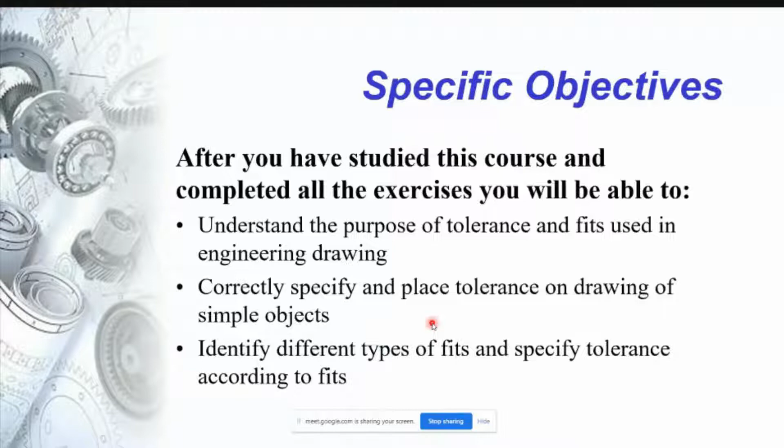Let's look at a drawing that you may have already seen before. In the previous exercise, there is an assembly consisting of pulley number 1, shaft number 2, nut number 3, and washer number 4. In shaft number 2, there is a dimension that has a suffix of g6.

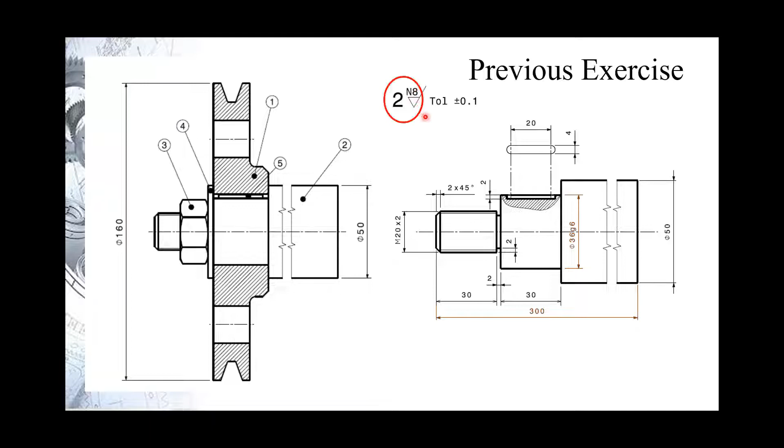g6 is the tolerance for the shaft diameter. And there is also another symbol here, which is N8, that is referred to the IT grade of the surface roughness, and also the general tolerance of 0.1.

Similarly, in the pulley, there is a tolerance. There is a hole with dimension of 36 H7. H7 is also the tolerance. And N8 is referred to the IT grade of the surface roughness. And the general tolerance is 0.1.

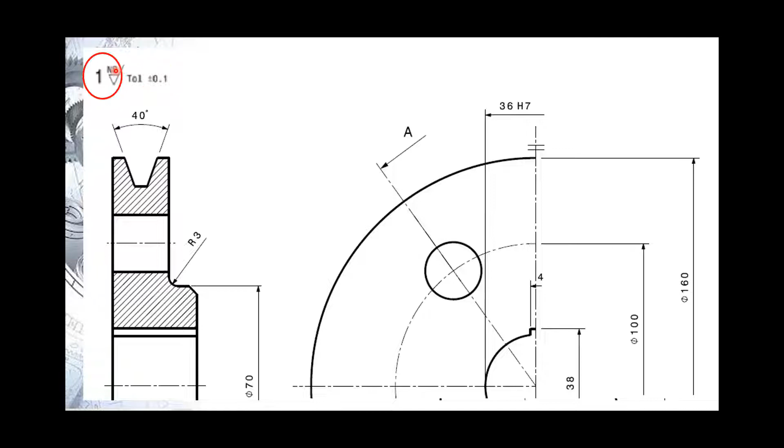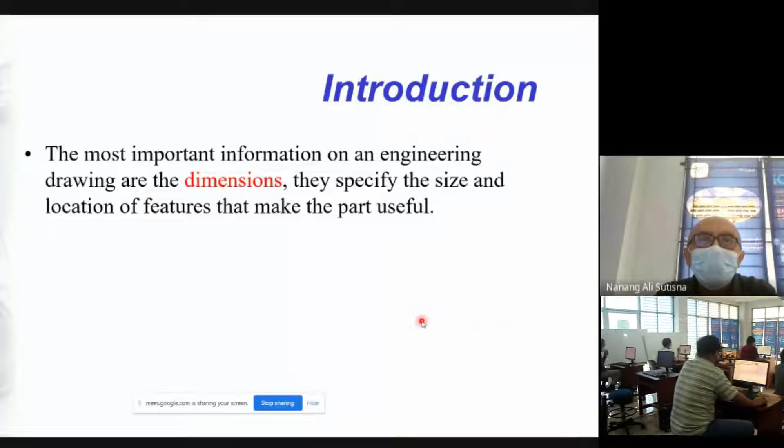Before going back, you need to understand that dimension is the most important aspect of the drawing. If you receive a drawing without dimension, you cannot make the part out of that drawing.

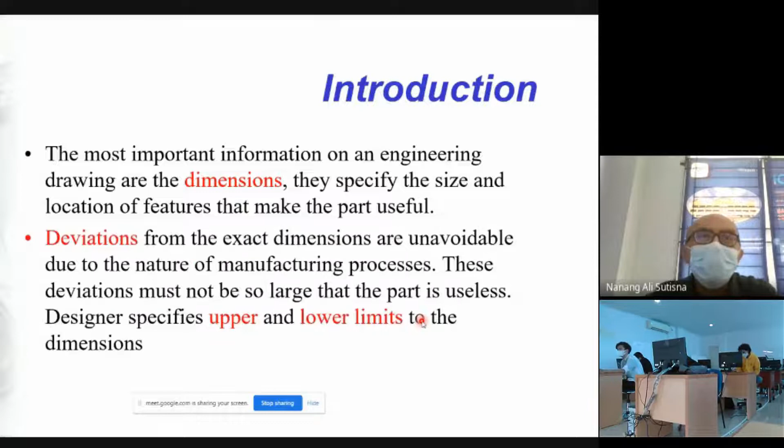Deviation from the exact dimension are unavoidable. Why? Because of the nature of the manufacturing process, the person who makes the part is different, the machine used to make the part is also different precision. Old machine and new machine, high precision machine and low precision machine, will produce different quality, different dimension, deviation. There must be a deviation.

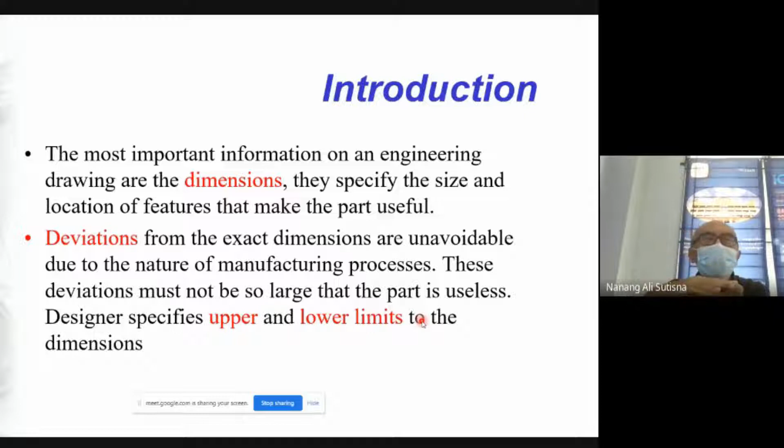So as a designer, you have to define how big it can differ from the basic size. So you will need to define the upper limit and the lower limit, so your part will be useful. Otherwise, it will not function.

We learn about tolerance and how important this is, especially in mass production. So the key point from this learning is when the size is tolerance, it is allowed to vary within a range limits.

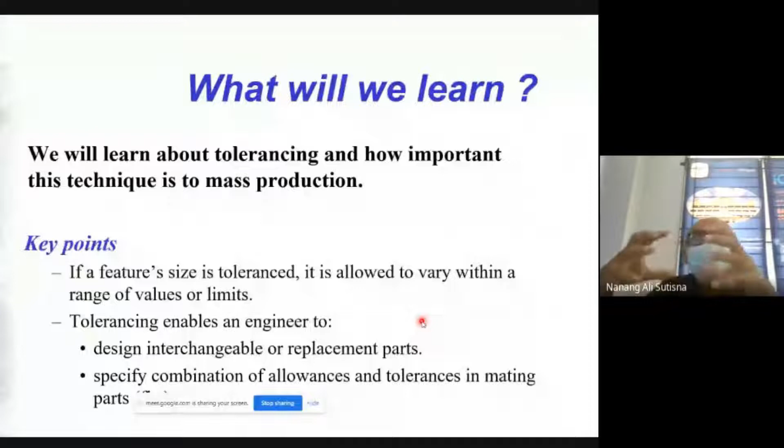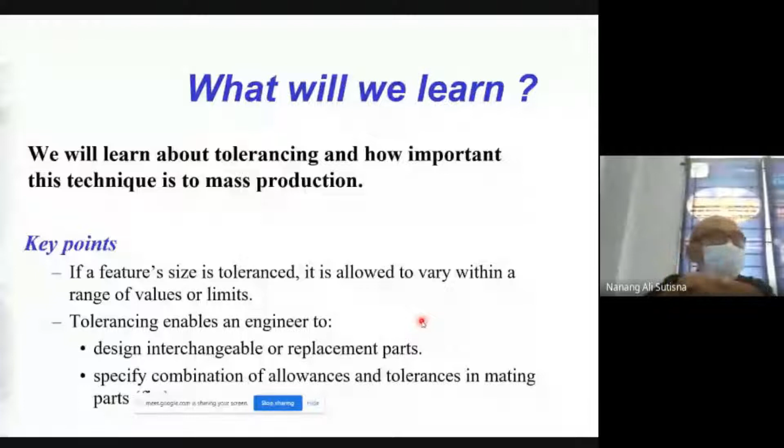And it will enable the designer to design interchangeable parts. So that's why you can buy the part from any other place in the world and you can fit them together because it's interchangeable due to this tolerance. And it specifies the combination of allowance and tolerance in mating parts.

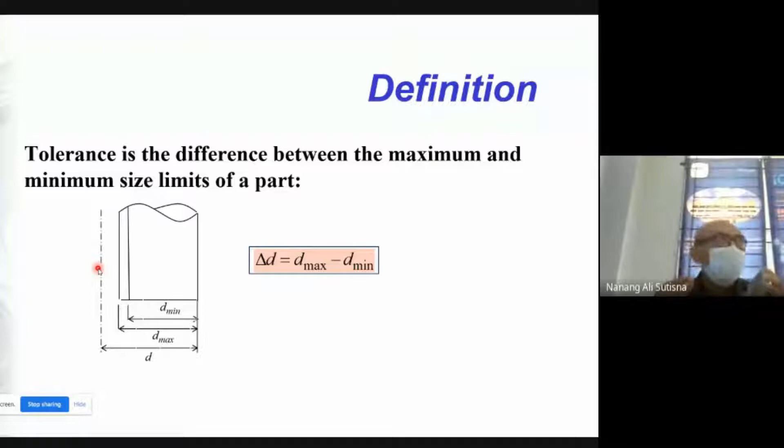And how much smaller? That's the question. So it's governed by the standard tolerance. Our concern is, if you make the part with very high tolerance, a very tight tolerance, then it must be made by a very high precision machine. So it will incur higher cost. If you want to make it very precise, high precision, then the part will be expensive.

But if it is very low tolerance, then the part may not function. It's too loose, for example, because the difference or the tolerance is too big, so it might not fit correctly.

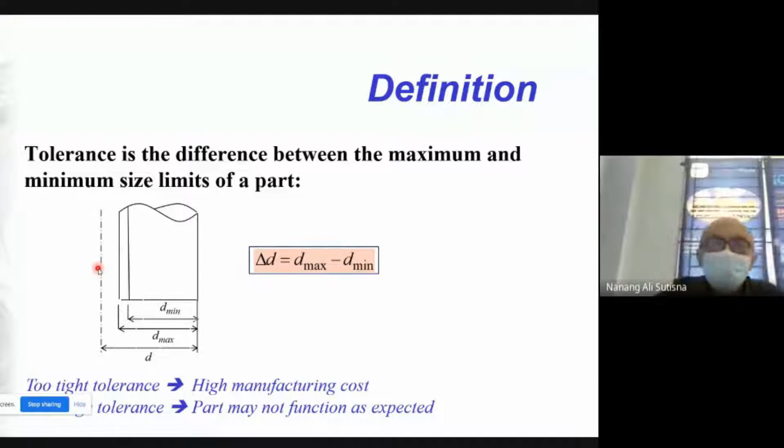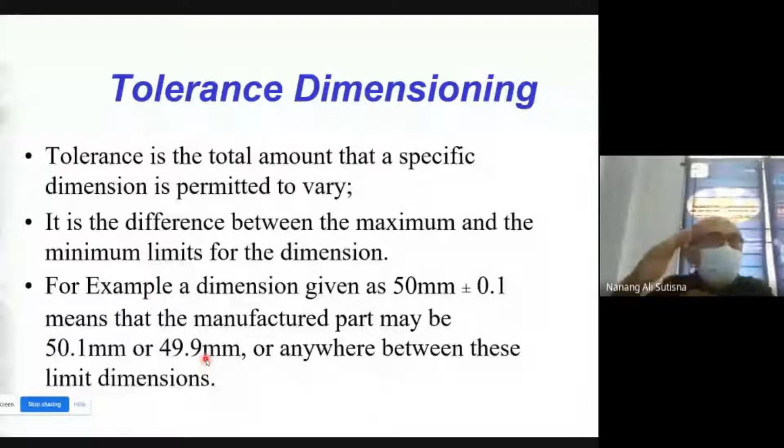Let's say this example: if the dimension is 50 millimeters plus minus 0.1, it means that you can make the part between 50.1 and 49.9. So in between, you can make it between 50.1 and 49.9. It cannot go bigger than 50.1 or smaller than 49.9. So your part will be in between. That's why you can make it anywhere, but as long as it is within the range of the limits, then the part will function. Right?

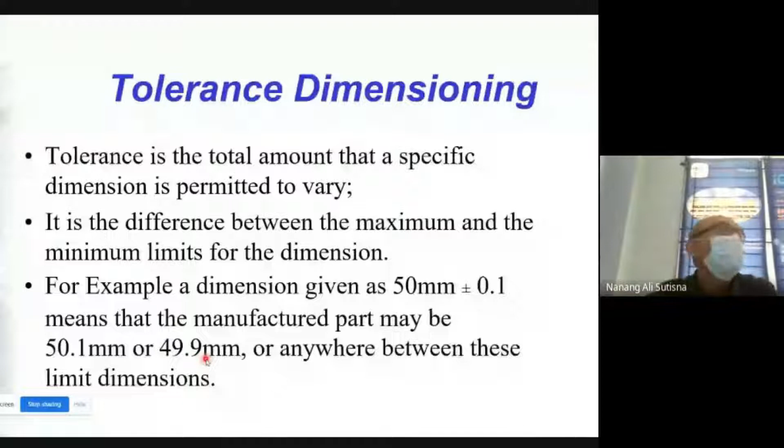This is the illustration. So this is the hole with 50 plus minus 0.1. But the shaft cannot be using 50 something. It must be 49.8 plus 0, meaning that it cannot be bigger than 49.8, and it can be smaller, minus 0.1.

So the shaft will always be smaller than the hole. Suppose that the hole is made with a lower limit, which is 49.9, and the shaft is at the maximum size, which is 49.8, it still can fit in because the shaft is smaller, 49.8, and the hole is 49.9.

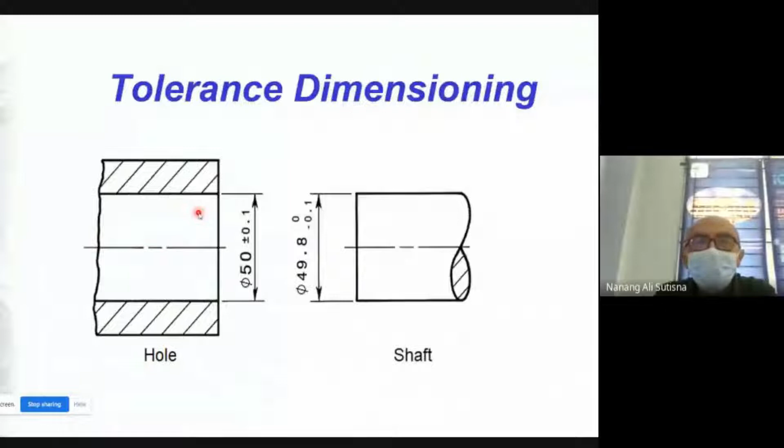How the tolerance is written? This is important for you. If you look at this, it is the tolerance. The upper dimension is the larger size, and the lower is the smaller size. Or it can be like this in the hole, or it may be written in the single form. You put the lower limit, then dash, then the upper limit. So this is one of the ways of writing the tolerance.

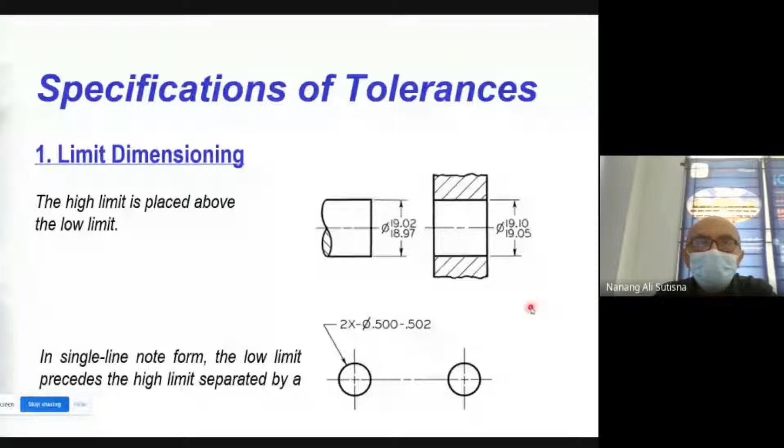The second way of writing tolerance is using plus or minus dimension. There are two types. The first is unilateral tolerance, where it only goes from 0 and bigger, or from 0 and smaller, just one direction, either smaller or bigger. So in this case, it is 47.70, it cannot be bigger than that, but it can be smaller than 47.70 with the tolerance of minus 0.05.

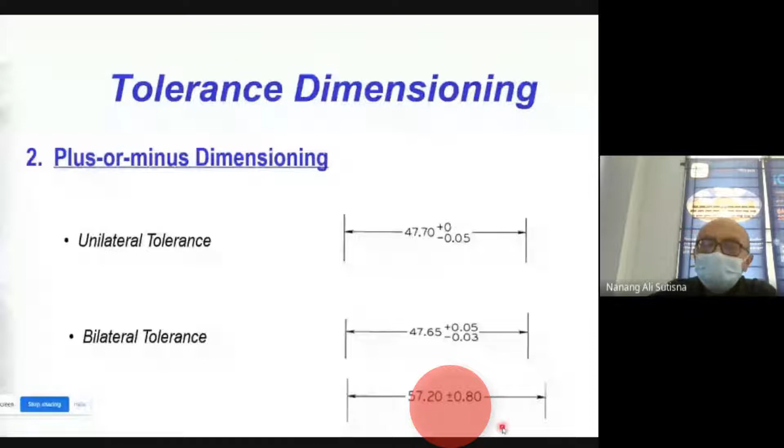Or it can use the bilateral tolerance. So you will have 47.65 plus minus 0.05, plus 0.05 and minus 0.03. As well as you use the same value for plus and minus, like 57.20 plus minus 0.8. The cumulative tolerance.

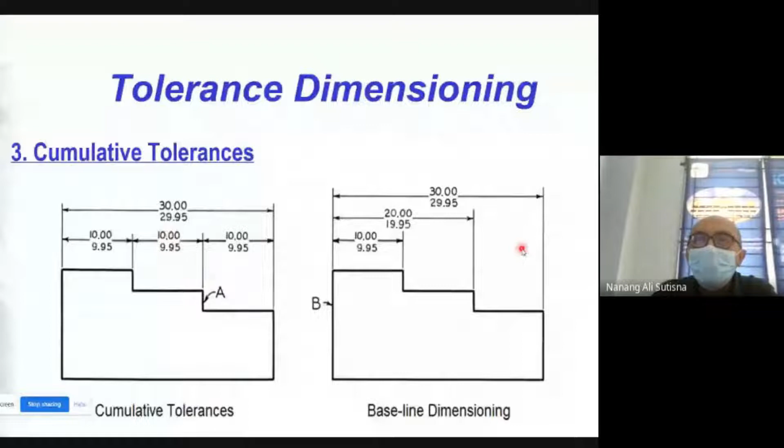It will make it confused. The operator, they don't see this. They only make it 9.95, 9.95, 9.95. Then by the end of the day, the result will be 29.85, which is out of tolerance. So you need to remove one of the dimensions that is not important. You can look at the right picture here. The dimension is not important. Okay, this is the basic understanding of the deviation.

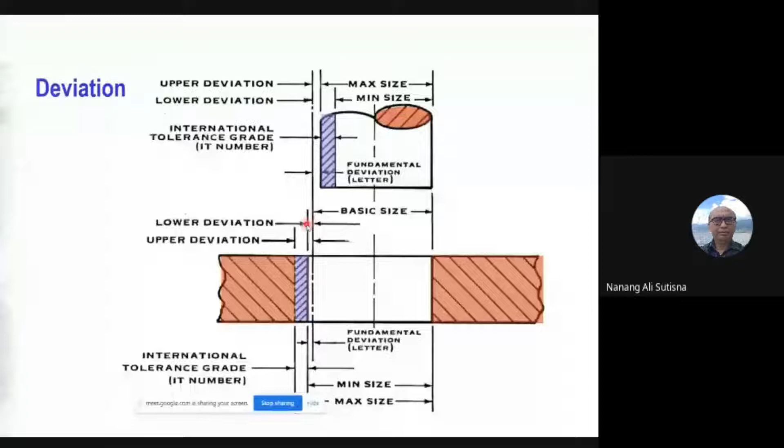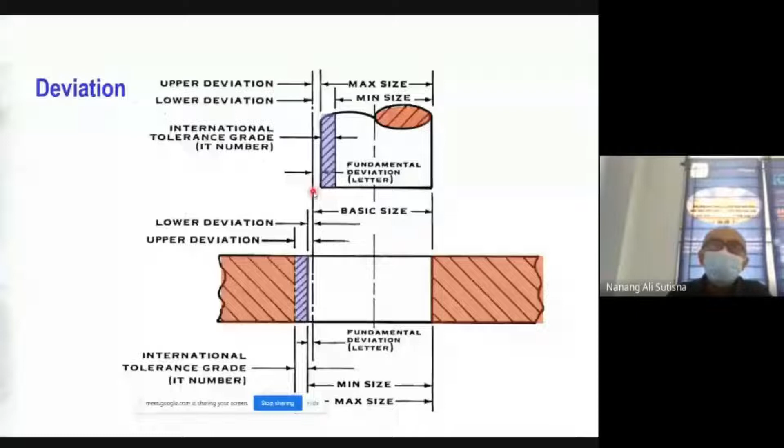There is a so-called fundamental deviation here. This is a basic size. The basic size of the shaft is here, the smaller size. But the basic size of the hole is the smaller size of the hole. But the basic size of holes will be bigger than the basic size of shaft. So if you look at this number, it means that if it is capital letter, that is the tolerance of the hole. If you see the lowercase, it will be for shaft tolerance.

So if combine, the fit will be 50 H8 F7. The hole will have H8 for tolerance and F7 for shaft tolerance. What is the value of H8 and F7? For diameter 50, I just would like to introduce you to the IT grade. When you look at this, 8 and 7,

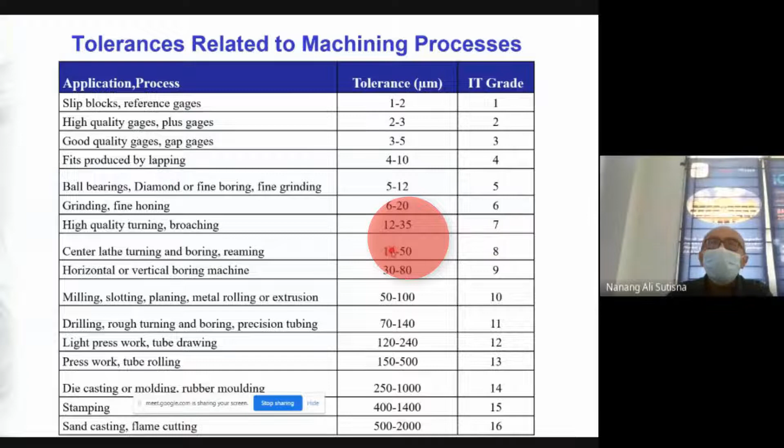if you make it grade 8, then the process will be the center lathe, turning, boring, or reaming. If you say this is grade 7, then it must be the high quality turning or broaching or reaming. So this is the quality of the surface, and it is related to the tolerance. If you choose the grade is 7, then the tolerance is between 12 micron to 35 micron. If grade 8, the tolerance is between 14 micron to 50 micron. So this means IT grade 8, IT grade 7.

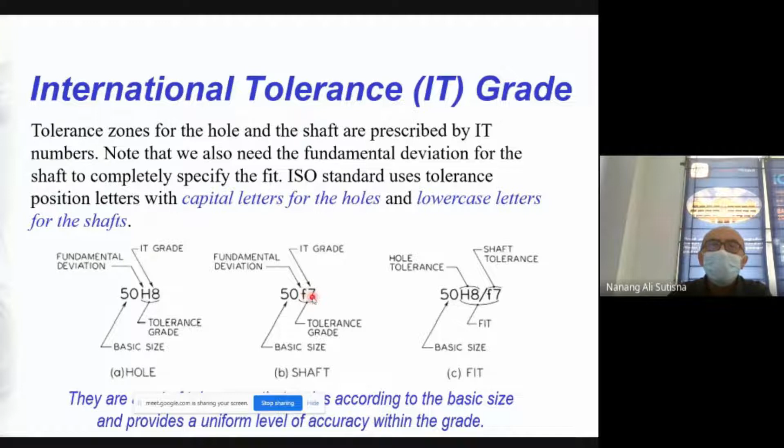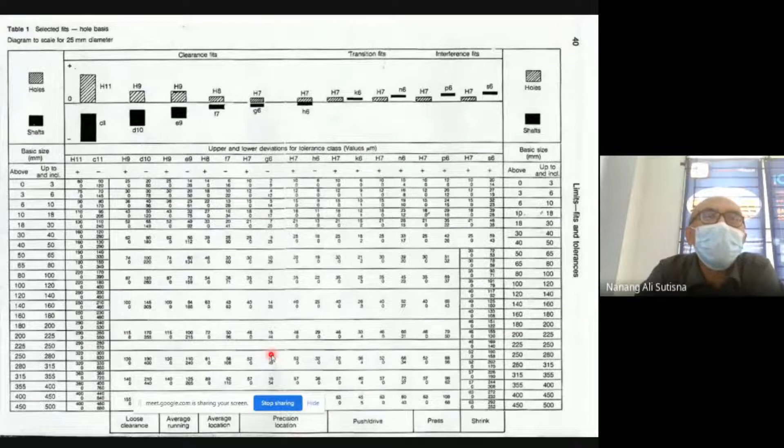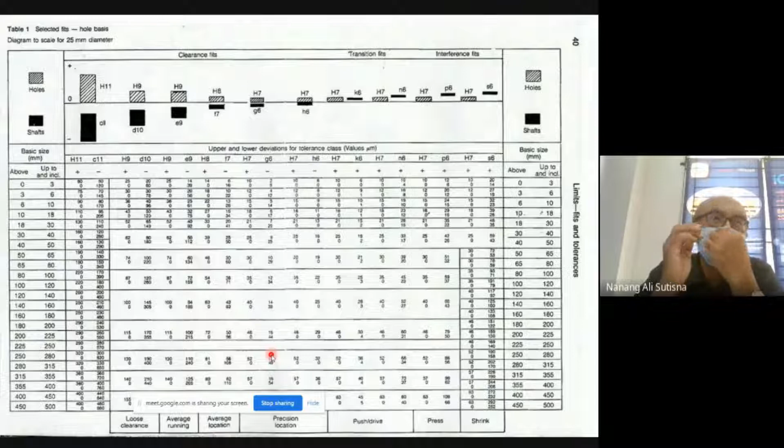And what means by H? This is the most important table as a designer or as a manufacturer. When you receive a drawing, it said the hole is H7 and the shaft is G6. What is the size? What is the tolerance? Now let's look at this table.

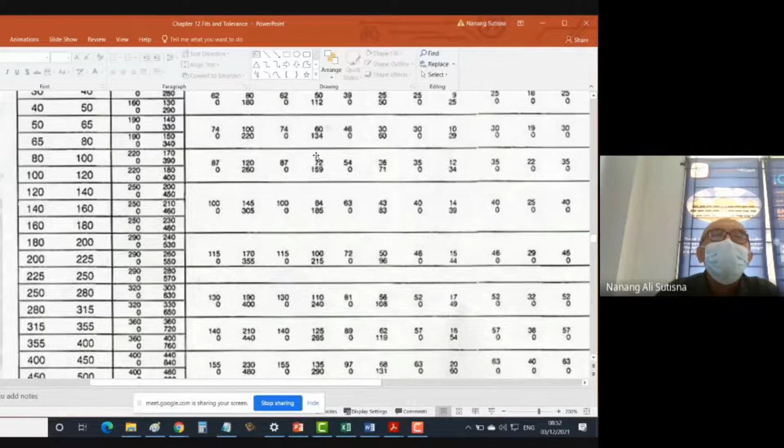I think I'll make it bigger. First of all, look at the, can you all see this number? Online students, can you see this number here? Yes, sir. Okay, good.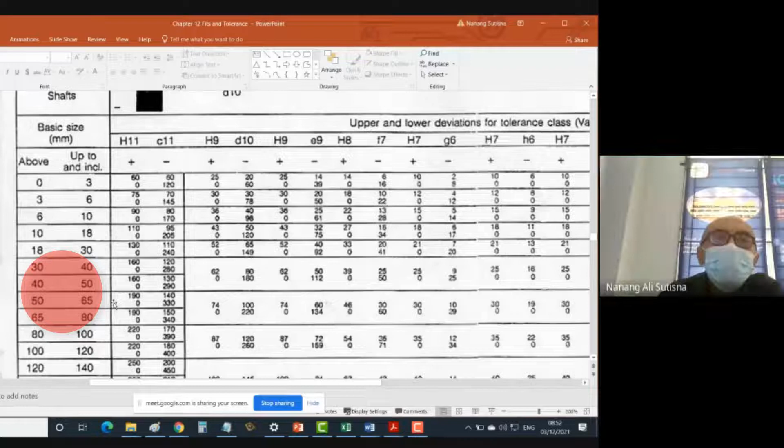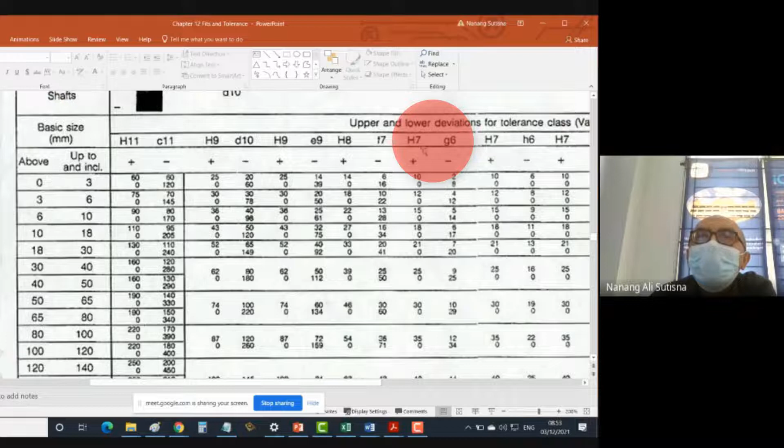So our size is 50, right? Before it's 50, right? 50 millimeters here. So it can be here or it can be here. Or if in between, then you can use this as well. When the diameter size is 50 millimeters, then go to the H7 and G6 here.

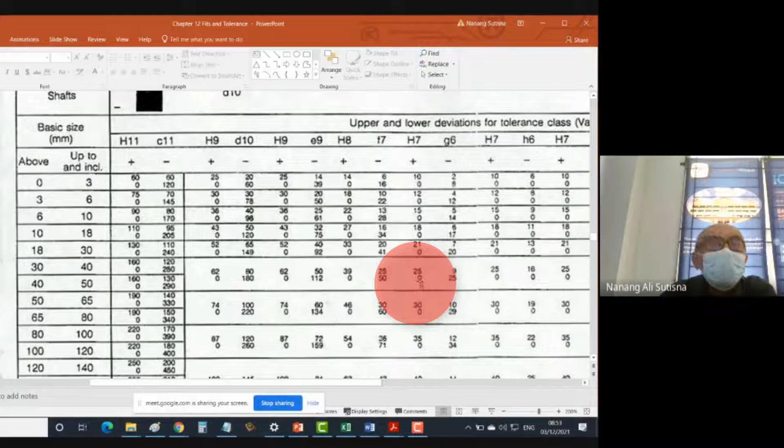H7 for hole, use plus sign, and this 25 and 0 in micron. So your size is 50 plus the tolerance 0.025 and 0. So this is the value of the limits. And the shaft is minus, G6 is minus. So 50 minus 0.009 and minus 0.025. So this is the tolerance.

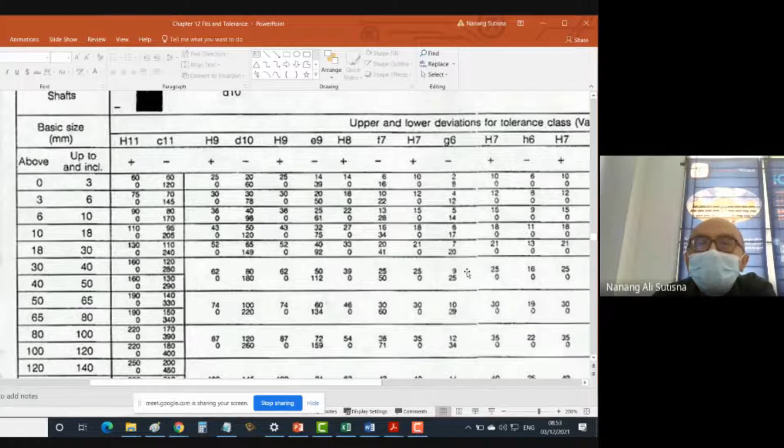So there are two types of tolerance. What we have talked so far, the limit.

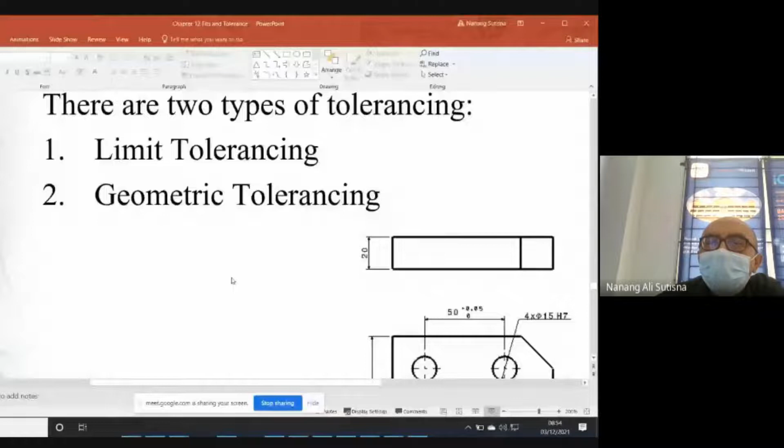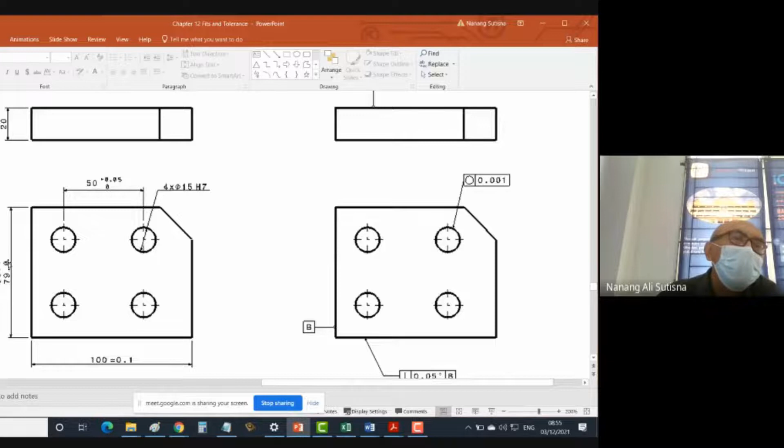And what is the geometric tolerance? Here you have 20 millimeters, and the distance is 50 plus 0.05 and 0. This size is 80.1, and 79.9 minimum, this is maximum. And this size is 100 plus minus 0.1. So it's called the limit tolerance, only for dimension.

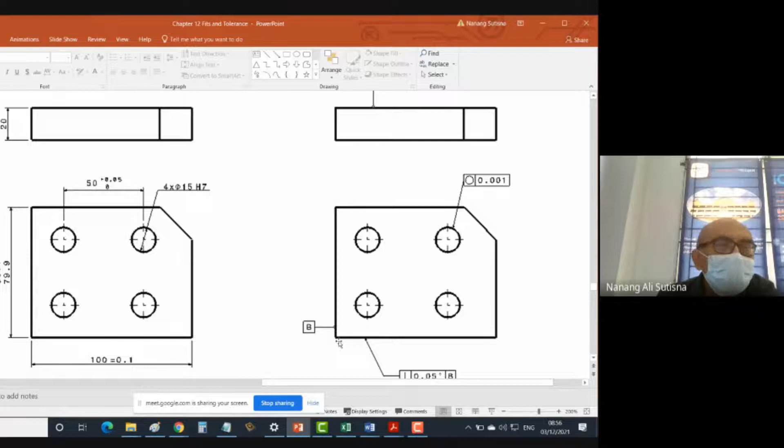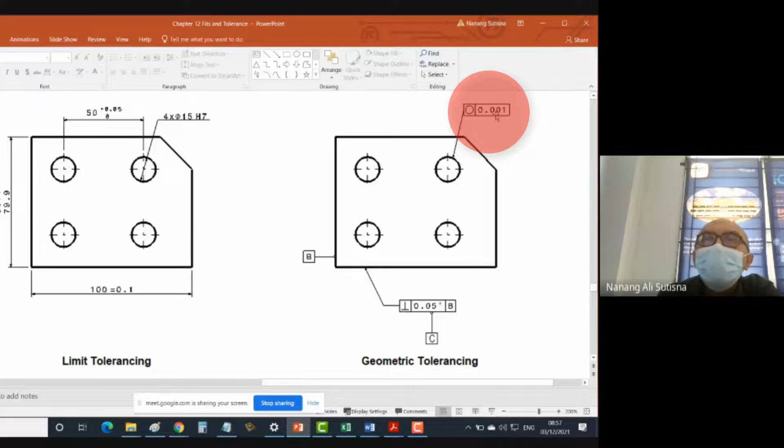And this is the circularity or roundness. It cannot be oval, it must be round. And the tolerance is 0.001. So this is the so-called geometric tolerance. Any question?

When you look at this symbol, it means straightness. So you can have a bar or a shaft very long, maybe 1 meter. Let's say you have straightness of 0.01 per meter. So when you do calculation, it can deflect, it can bend, but not more than 0.01 in 1 meter. If this is 2 meters, then maybe 0.02, because 0.01 is in 1 meter.

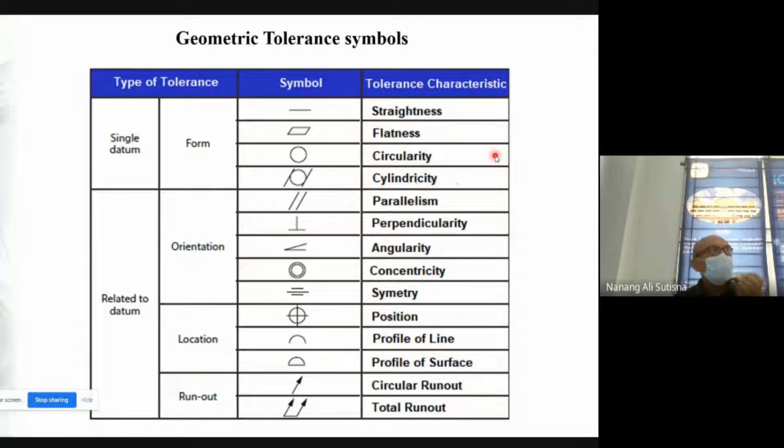So this is straightness. The flatness - I don't know if you can see this - this face must be flat. It cannot be bumpy, it cannot have a kind of contact issue, there's a flatness. But it has a tolerance, for example you can put 0.01 for flatness, so it can vary 0.01. You can also use circularity, cylindricity, parallel, or perpendicular.

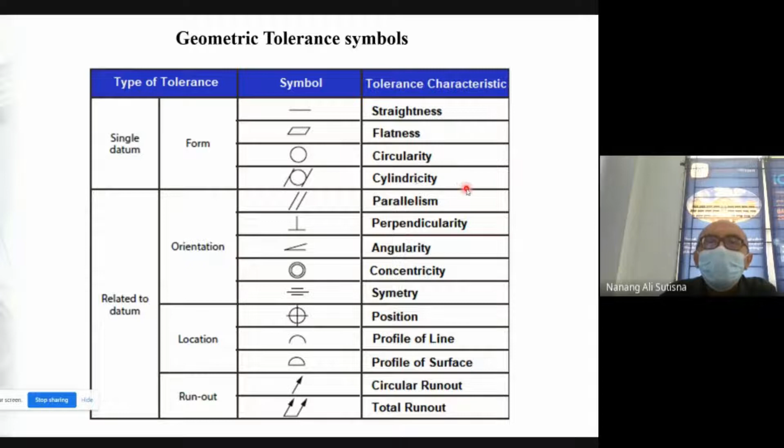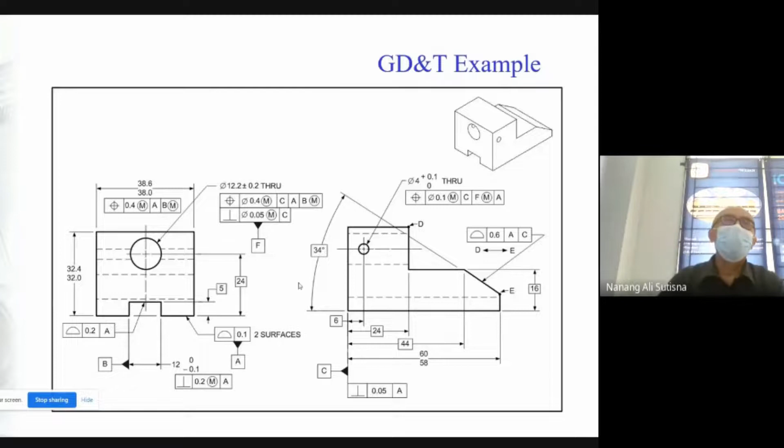Right? Is there any question? If not, then we go back - okay, I want to ask basic, sir. I saw the symbol, circle M. Can you explain it again, sir? What does that mean?

Yes sir, how about THRU? What does that mean, sir? Through means this is not a blind hole, so you drill this through all of the part. If this is a blind hole, for example the depth of the hole is 10 millimeters, then you will put 12.2 plus minus 0.2, depth 10, meaning the depth is 10 millimeters. If this is thru, then it is the thru hole - this is the American spelling here, THRU. The English spelling is THROUGH, but same pronunciation, true. Does that answer your question?